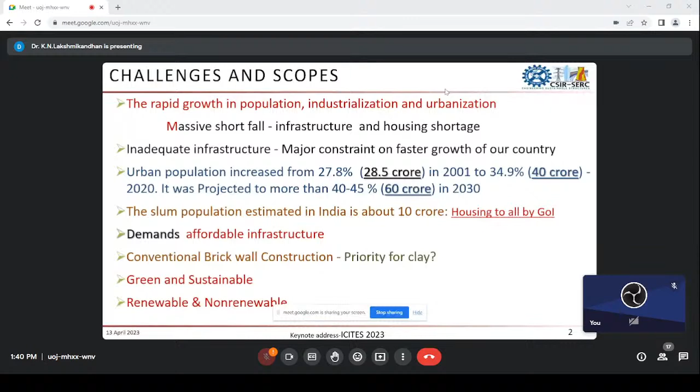These are the challenges, scopes, and aims we keep in mind for developing the technology. In this aspect, we found precast construction technology, and we see a lot of future for the construction industry, both in residential and commercial building construction.

So why do we actually need precast construction? One reason is it is the technology for the future, and another is we are suffering a lot with labor and construction material, and the rising cost of materials. This is another factor we are facing as a problem.

Also, the unplanned construction practices we use currently waste a lot of materials and natural resources, which is a key concern. Similarly, conventional construction normally disturbs the movement of vehicles, causes traffic inconvenience, and environmental disturbance. These are some factors we see in regular construction activity. So we feel that precast construction, along with affordable construction practices, are key for the future development of the country.

So how can we achieve this? These are some points on how this can be achieved. We can plan for this because precast construction always follows a regular pattern, and we also use technology for mass production.

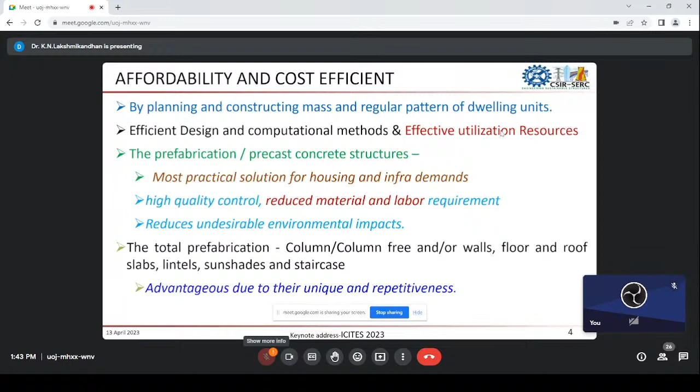This is a very big advantage we have. If we can capitalize on these advancements, we can get much better quality control.

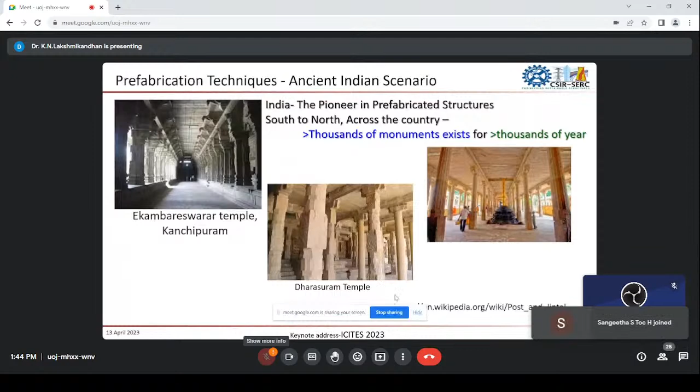Prefabrication or precast is not very new to the Indian continent. Considering more than 1,000 years of practice, the Indian continent has been very keen to develop prefabricated construction using these tools. Thousands of monumental structures existing around us showcase this ability for prefabrication construction.

As a current scenario, the Indian perspective is focusing on development of precast construction, which may include only the superstructure or both substructure and superstructure. Everything nowadays is pre-planned, and we are developing the technology.

These are some of the basic codes we should be very keen on and thorough about when implementing or developing any technology. One is IS-456, which is very important and basic to us, along with codes relevant to prefabrication, including prefab construction.

IS-15916 and IS-15917, and for construction of large wall panels - that is, prefabricated large panels - we can go for IS-11447. These are some of the codes, and it's very important to know the points given in each code.

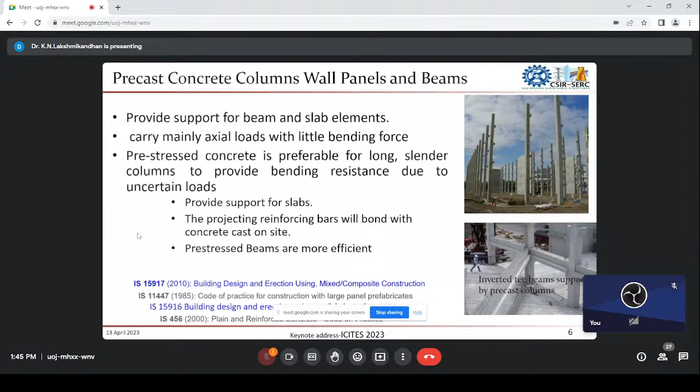In all this prefabrication construction, there are a few things we can concentrate on separately, because they have huge potential for saving cost as well as improving the quality of construction.

One is the roof. Normally the roof constructed in commercial construction exploits around 30 to 40% of the steel, and if you consider the cost, around 15 to 25% of the cost is mainly for roof development. So if we can develop technology that contributes to closing these roofs, it can save a lot of resources as well as initial fund spending.

You are very familiar with two-way slabs. Normally, one-way slab action is the preferred construction practice in the industry nowadays. But the two-way slab has very good scope, as well as better economy and load distribution factors considering the two-way slab action. The prefabrication industry is now concentrating on developing two-way slab construction, which we will see later.

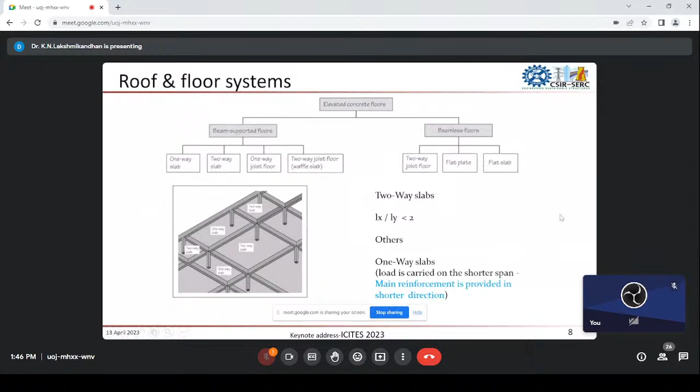This is the pattern of load transmission. Now I'm going to present 4 technologies we developed focusing on rural areas, semi-urban areas, or urban areas. We have developed many technologies, and among them I'm going to present the 4 technologies we developed for rural implementation.

Normally, ferrocement is a good material composition with good scope for future construction practice. It is a composite material - a refined mesh combined with mortar, trying to act together rather than as separate steel and separate concrete as designed in normal physics. This is a totally different way of behaving - it behaves like a single entity.

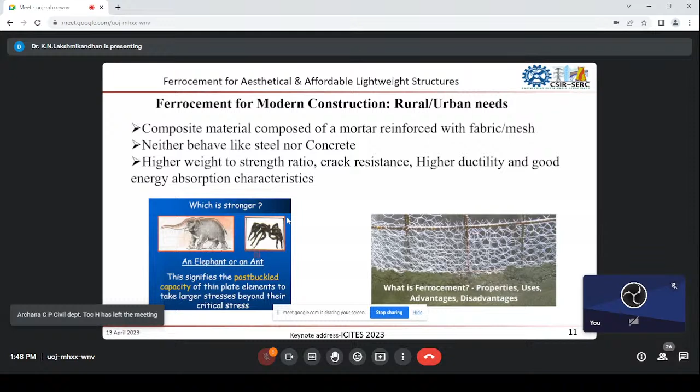Normally, if you're comparing with an RC structure or a plain concrete structure, whatever the case, this ferrocement will have a higher weight-to-strength ratio. This ferrocement comes under very thin elements, and thin elements have enormous post-buckling behavior, which contributes a lot to the strength and load carrying capacity.

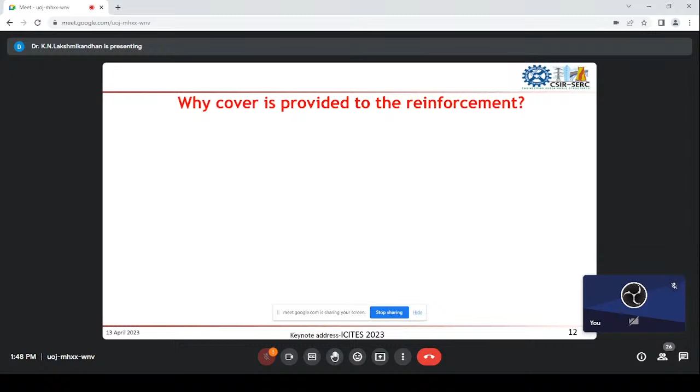So why is cover provided? When it comes to reinforced concrete, the cover plays a major role. If you take a regular reinforced concrete structure, what is the cover and why is it provided? In what ways can we achieve proper cover? Because cover is a very key parameter for the reinforced concrete system. We have to ensure that proper cover is provided using cover blocks and proper protection, which protects the reinforcement from corrosion.

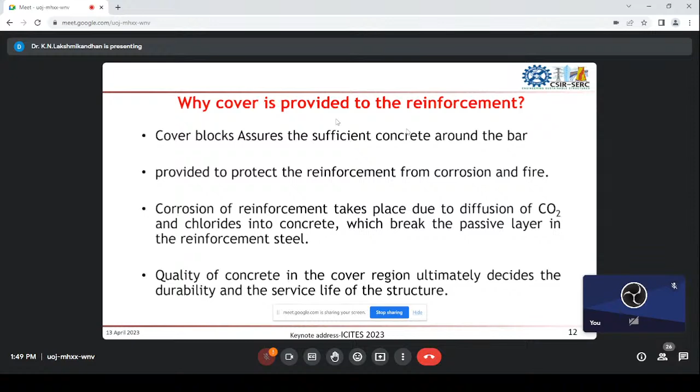So the quality of the concrete normally depends on what cover thickness you have provided for the reinforced concrete system.

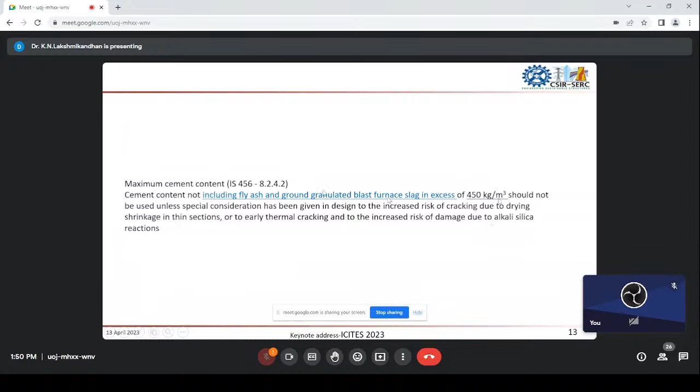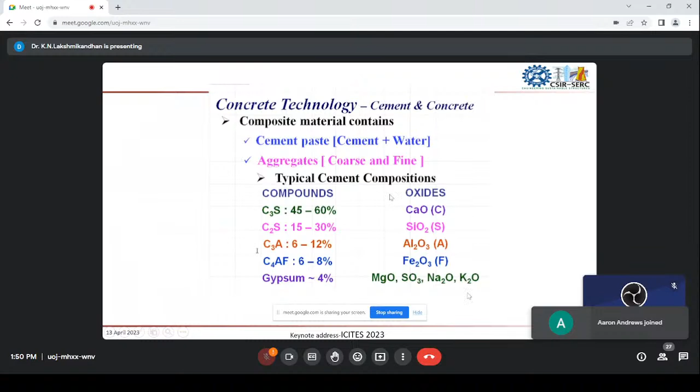If you consider the cement's chemical composition, it has tricalcium silicate, dicalcium silicate, tricalcium aluminate, and other oxides. These are all compositions of cement available for the development of its characteristics.

This is the general hydration, the chemical reaction that happens when you add water with cement. Normally this is called the binder property, and this quantity is normally around 45 to 60%.

The remaining product after the reaction is calcium hydroxide, which is a very key chemical property that makes the concrete durable. This maintains the alkalinity, and the pH is maintained around 12.5 to 13.5.

This is the key factor which protects the rebar from corrosion. As long as the concrete is in an alkaline state, it can protect the steel. When it becomes acidic in nature, the steel starts to corrode, and it becomes accelerated corrosion, quickly losing its properties.

But what is the percentage? Normally we need to maintain this pH around 10 to 15%, around 13% normally we consider. The 13% presence of calcium hydroxide can keep the pH around 12.5 to 13.5.

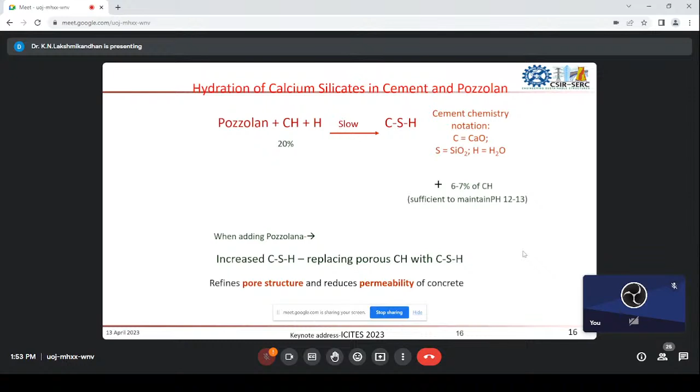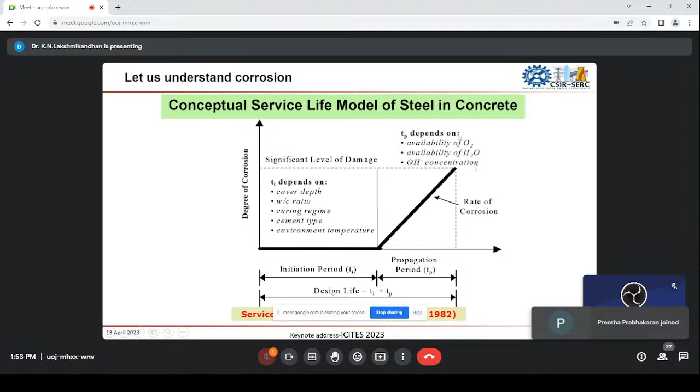This is the typical representation of the life model for steel in concrete. This is the initiation period - during initiation of corrosion, the steel will be strong enough. Once corrosion is spotted, it becomes very fast and accelerated. This generally depends on the availability of oxygen and water, and the OH concentration. Normally when the calcium hydroxide concentration is very high, corrosion is controlled; if there is a reduction in calcium hydroxide concentration, then faster corrosion happens.

This is how the steel gets corroded - there are two reactions happening in this corrosion aspect: one is the anodic reaction, and the second is the cathodic reaction. In the anodic reaction, the steel reacts with water and releases an electron. That electron travels and reacts again, combining with water molecules and oxygen available within the concrete medium, forming OH again. So this anodic and cathodic interplay causes the corrosion aspect.

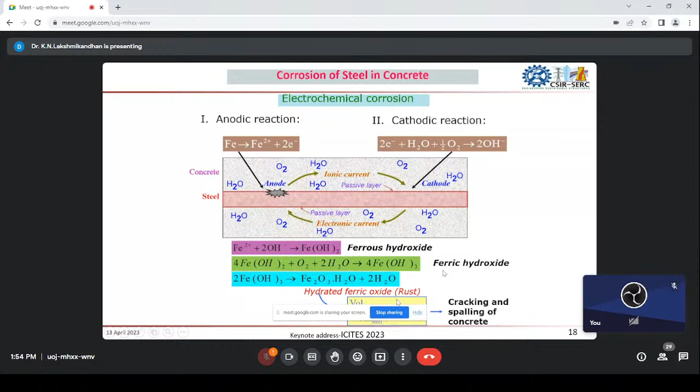In a similar way, chloride enters into the concrete and reacts with the calcium hydroxide, and makes the alkalinity into acidity. So in both ways, what we see is the carbon dioxide or chloride does not directly impact the concrete; it only reacts with the calcium hydroxide.

Once the calcium hydroxide, which is normally called the passive protection layer, is breaking down, then corrosion starts. So this way, carbon dioxide or chloride contributes to corrosion development.

When you see the corrosion aspect, generally Fe represents the reinforcement. These are different stages of different chemical compositions of iron, reacting with water and oxygen, creating different compositions. Initially, the diameter of the rod will be increasing 2 times, 3 times, 4 times, up to 7 times its diameter.

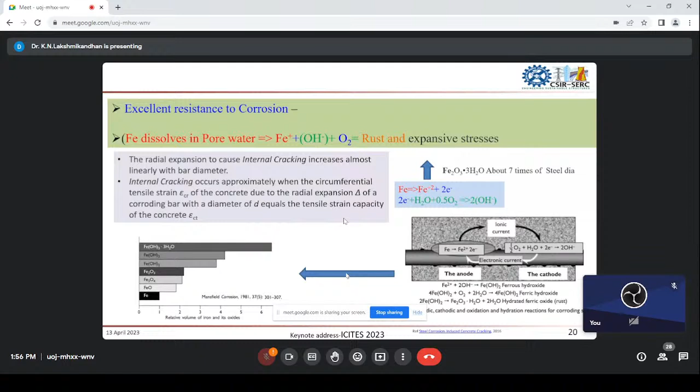From the basic instincts of material characterization, what we find is cement content. If you have more cement content, there will be more calcium hydroxide. And if the concrete is very dense, it will not permit water or oxygen to enter.

This way we can control corrosion: one is by keeping the passive layer sufficient, and second is by keeping the density very high, so we protect the concrete composite.

Similarly, calcium hydroxide or the oxides are chemicals which protect the steel by becoming a passive layer. So if you can control carbon dioxide and chloride diffusion, which normally react with the calcium hydroxide,

then you have control, and corrosion cannot start, so the durability of the structure will be very, very high.

If you use galvanized iron, it becomes a compensating agent that reduces corrosion. Similarly, using a smaller diameter of wire helps.

Wires like 1.25 mm or 2 mm have a very small diameter. With such small diameter wires, when there is a possibility of corrosion, the volumetric increase will try to bulge.

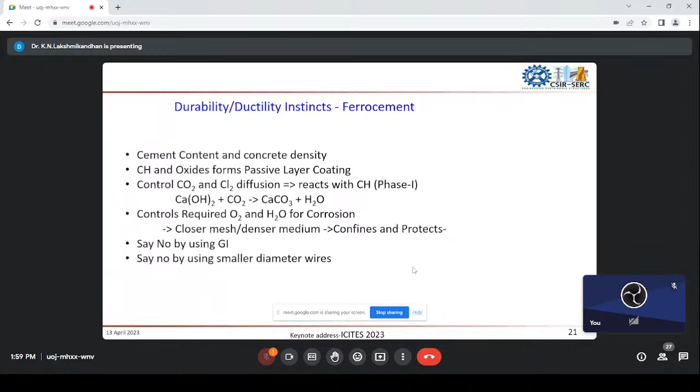Now let's come to ferrocement. In ferrocement, we effectively utilize these aspects. That's why ferrocement is a non-corrosive, highly ductile material, because we combine all these characterizations together and utilize them effectively.

Now come to the strength aspect. When you come to ferrocement panels, it is a very thin element. If you apply a compression force, it will take the compression force until it reaches the critical stress value.

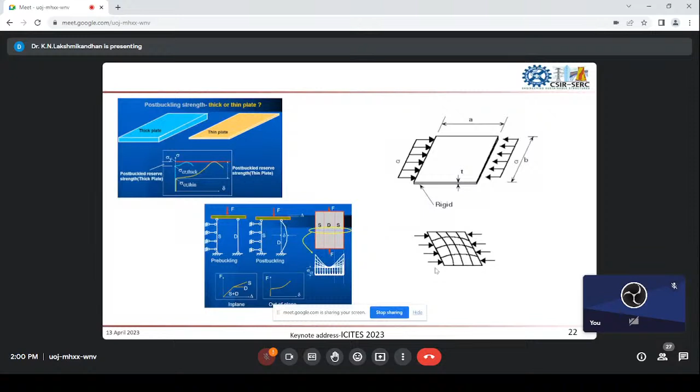Once the critical stress value is reached, because of the thin section, it buckles. When the plate starts to buckle, the post-buckling strength is reached, which gives more strength compared to what we normally design in plain concrete or RC concrete.

We are developing many technologies focusing on many applications, based on a few of the applications.

This is a typical test we carried out to check whether post-buckling phenomena is happening in ferrocement or not. We developed a flowable mix so that we can go for single casting of ferrocement panels. Normally in the earlier period, they would go for plastering with a high-skilled mason, but now the availability of high-skilled masons is very rare, and it's difficult to get people who can achieve a good finish and proper compaction in the ferrocement medium.

So the alternative we decided on is to go for single casting of ferrocement. This is the way we developed a mix which can flow into the mold, and this is the final system we developed: ferrocement with ribbed edges, and every 1 meter we propose to give a rib.

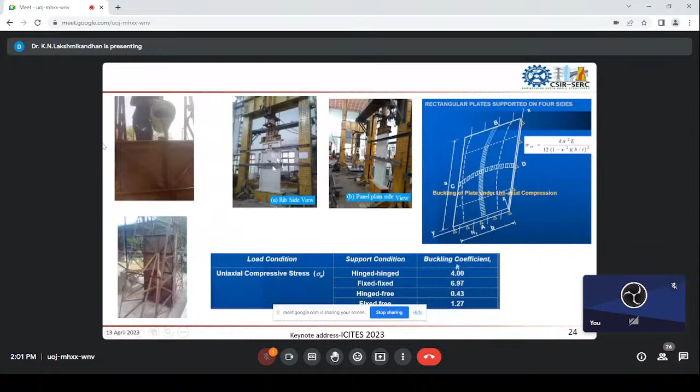So that each bay will act as an individual panel. What we are trying here is to avoid global buckling. We are trying to convert the panels so that it goes into non-global buckling.

So we developed different technologies, and these are the technologies we developed with precast engineering for the service core units. Everything is cast at the site and then assembled in the field. This way, within 2 or 3 hours, we can assemble and utilize these service core units for public use.

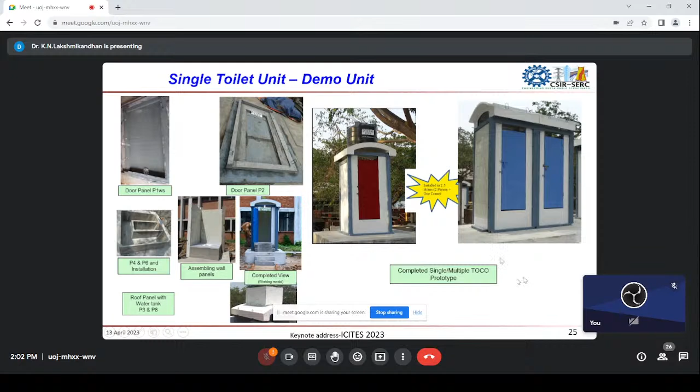Similarly, we developed many formats, because cost is a key factor in the Indian context. So to cater to the different demands available in the field, based on the affordability of the people, we developed many technologies. The technology we earlier developed costs around 20,000 to 25,000 rupees. We transformed this technology with a partially superstructure and partially substructure system, so that the cost comes down to around 10,000 rupees. These are different technologies we developed using ferrocement.

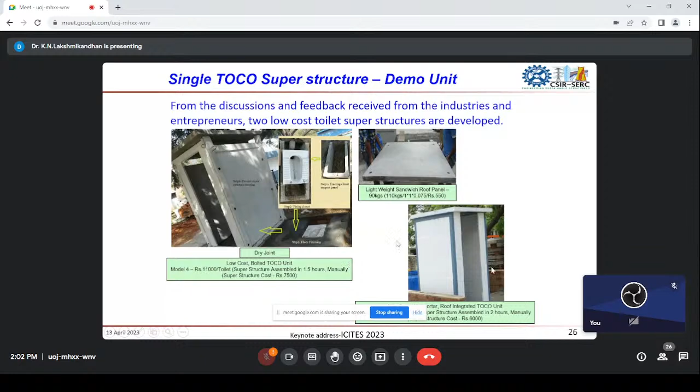The latest one we develop—we keep developing technologies because of the simplicity and ruggedness, and how we implement the technology in the field, how we see it being implemented, and what is the requirement of machineries. These things normally govern any precast product implementation.

So this is one technology we developed. There's no need for any machineries or equipment, so we can simply install each component in the field without any difficulties.

So the final view of this one is like what we are going for with the single casting. The same way, we can see the surfaces after finishing with proper coatings.

So this is one more technology. The same ferrocement technology we used for developing sedimentation and percolation septic tanks. In these cases, it's like an array system, so each tank will be filled simultaneously, and we can close that system so it's permitted to percolate. Meanwhile, the next one will be used for the practice. This way, we aim to control the higher capacity septic tank requirements.

The same technology we used for developing water tanks. This water tank is cast in a single casting using flowable concrete, with 25mm thickness, which can hold the water. Regarding the corrosion aspect, the concrete itself is sufficient, having enough strength to hold the steel together, so steel corrosion will not happen.

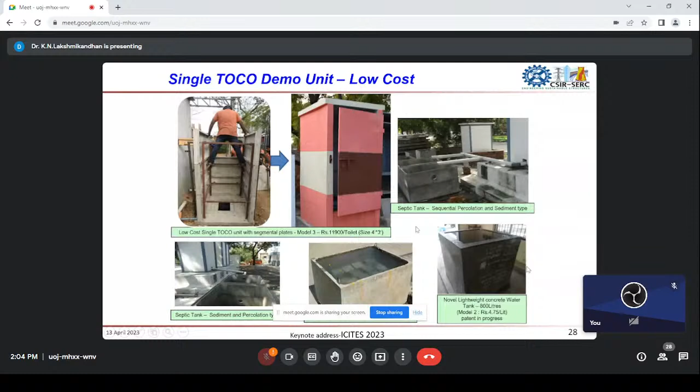So this is about the single system for service core utilizations. So considering the housing demand.

Now considering the housing demand, what is available in practice is brick infill built into framed systems. When there is any lateral load, like seismic or wind, whatever the case may be, it transfers the load into the bricks, and the bricks initially take a lot of load due to higher stiffness. Once cracks start, the structure begins to fall down, which creates a major issue in normal building construction.

This is the key factor concerning why we can go for the alternative instead of brick infills. If you apply the lateral load to a ferrocement infill, the capacity is different because this entire system acts as a single system till failure. Because of the thinner skin, it starts to buckle in the lateral direction, that is, the out of plane direction.

Normally in the out of plane direction, cracks form, and the brick falls out of plane because it does not have enough capability to hold together. But in ferrocement, the case is different, it has enough strength to hold together. As a result, the entire system acts together until the ultimate failure, avoiding the falling of any concrete.

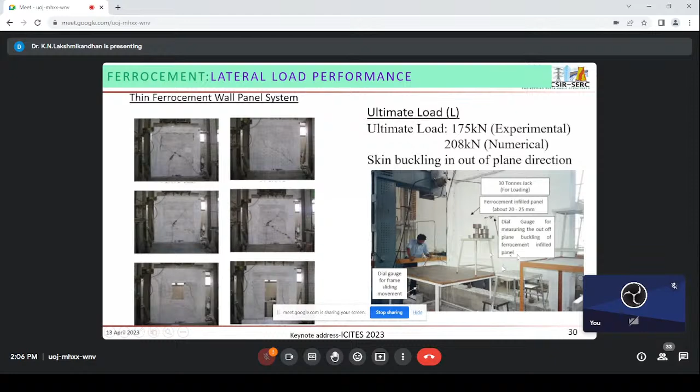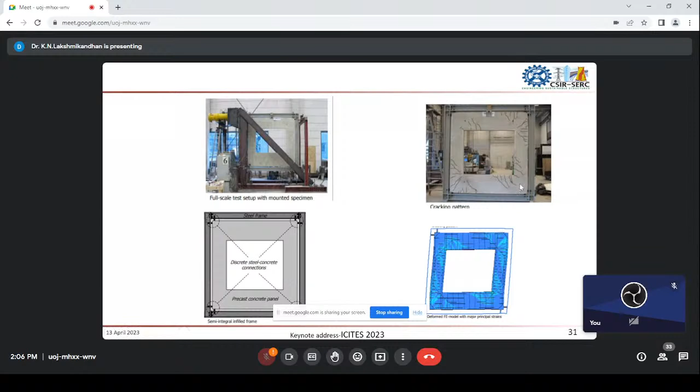This way, ferrocement is a very high demand composite for the construction industry. When there is an opening, the behavior of ferrocement is still the same way. After the crack, it acts together, giving it higher strength compared to other construction practices. The post-buckling characterization, the strength characterization, and the confinement action are all combined together in ferrocement, and as a result we get a much better wall.

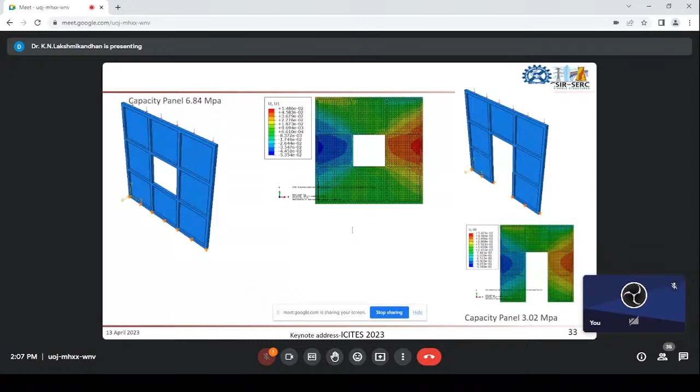So we examined this using finite element software. These models are created using Abaqus, and we used the damage plasticity model. We checked different configurations for developing housing, with openings such as window or door openings, simulated in the software. We integrated everything together and found it behaves the same way as conventional structures, at a much lower cost.

Because of this reduction in dead weight, it will be more advantageous during any earthquake or lateral load distribution. These houses can be constructed within hours, maybe within 12 to 20 hours we can construct a G+2 structure. It is lightweight to handle, and finally all the components are integrated together so the entire structure acts together during load transmission.

Similarly, the construction cost drastically comes down when using this ferrocement construction housing. It comes to less than 600 rupees per square foot, which is very less compared to what is in practice now, around 1,500 to 1,800 rupees per square foot.

Regarding durability and ductility, because of the nature of the material, ferrocement acts together as a single material and exhibits good ductility and good durability over time. Now coming to heat insulation and sound insulation, this is a key factor to think about whether ferrocement can be used or not. Normally these types of structures may be useful for urban, semi-urban, or rural areas.

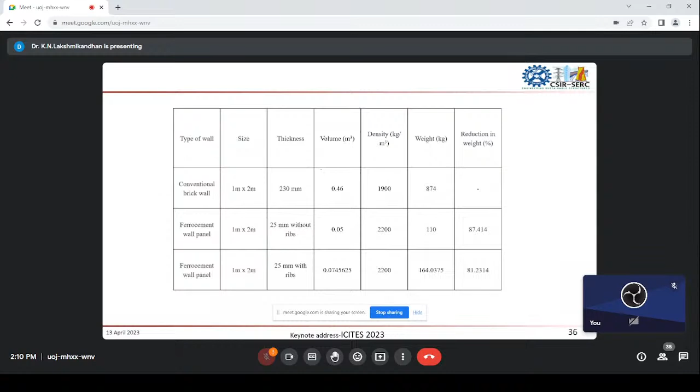Positive curvature will compensate the tension whatever comes there, and the negative curvature normally will compensate for the compression. So we are compensating the compression and tension using the shape itself, so there is no requirement of reinforcement for transferring this load to the structure.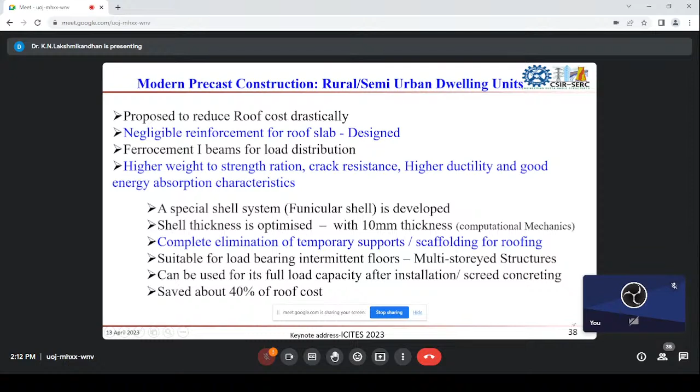Second, the weight reduction is around 30 to 35% of roof weight coming down because of this technology.

So these are the typical ferrocement models we developed using SolidWorks, and then from SolidWorks we transformed and imported into Abaqus, and we modeled this particular shell. If you see this, this is the positive curvature, and if you see these edges, there will be a slight downward curve representing the negative curvature.

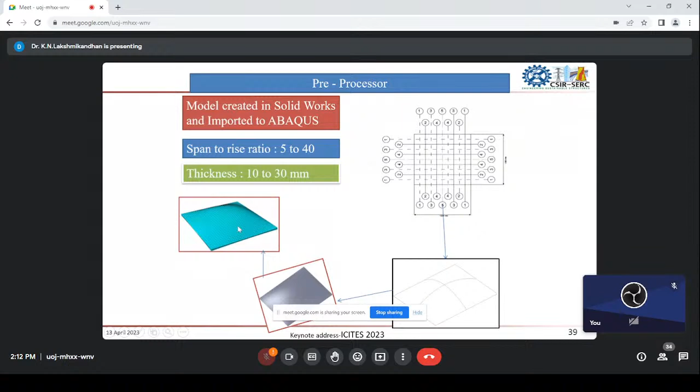So the shell itself has both positive and negative curvature, so that whatever results we are getting from the external loads will be compensated by the shell. That's the way we developed it. So this is a typical view of the models, for the single point when there is a single load.

We consider both two-way action and one-way action, because both have application in practice. For the one-way application, we can place these ferrocement elements in a row, and similarly row by row we can go for construction so that we can easily finish the roof within a short duration. That's why the one-way slab is very useful.

And if it is a two-way slab, you can do a single unit or multiple single unit systems, then go for the four-edge supported system. In both ways we have advantages, and we have to decide which one is better for our cases. In both cases we have good load carrying capacity, and this is the typical testing we did for this.

This shell we are seeing is the slab weight. Normally we are naming this shell a slab here, 1 meter by 1 meter, and the total dead weight of the slab is just 60 kgs. That is the beauty of the system. The thickness of the shell is 10 mm, and there is no reinforcement provided in the shells. The shells you are seeing here are without any reinforcement.

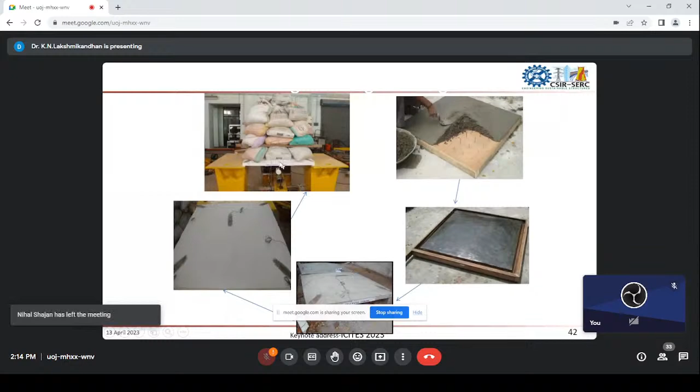So this is a typical implementation. This is the ferrocement I-beams we developed and tested. It shows very excellent ductility characteristics, and this is the implementation of the shell.

In total we used 32 shells, 32 shells meaning 32 into 60 kgs. That's all the weight of the roof for a span of 4 meters by 9 meters. So this is a typical view, you can see.

The total cost saving we are seeing here is 30%, and the total scaffolding requirement is totally eliminated.

So there is only one problem we see during erection: if there is any sudden accidental load, like an impact, because the shell is unreinforced, careless action during erection will create a catastrophic failure where the shell entirely fails within a few seconds.

But we don't usually have that issue. If you are capable of erecting it properly, it can carry a load of 1,500 kgs per square meter when applied gradually. But if applied suddenly, it cannot even take 15 kg of weight—sudden failure will happen. Considering this, we are now revising our technology using fibers.

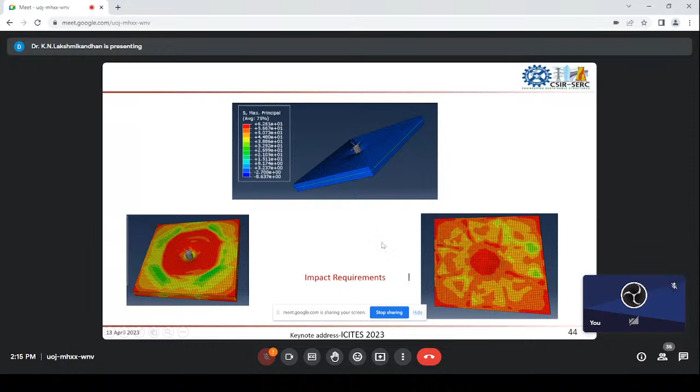Now we are doing impact studies. Maybe we will come up with the product within a few months.

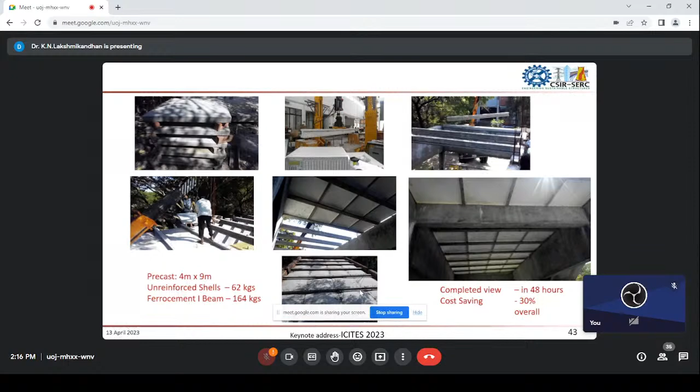So this is about the technology we developed using an I-section with particular shell panels in between. On top of this, a lean mix screed concrete will be placed, and that can be used as a roof for the next floor—that is, the floor for the next level.

Okay, now I'm coming to the next very important thing. Just to finish within 5 minutes, I will go through the things.

So we were constantly working on developing the precast sandwich panel technology. Whatever the earlier setbacks were, like thermal comfort or sound insulation, we are coming with another technology. It is a double skin - instead of single skin ferrocement, we are now using a double skin ferrocement on both sides. How that integration happens and what the infills will be, these are the factors governing the efficiency of the system. We filed 2 patents and received our patent numbers for protecting this topic.

So this is a typical view of one of the 3D panels. This is called a standard panel, normally available in the market, which has two meshes at the edges integrated together with a three-dimensional truss mesh. This truss mesh connects the two reinforcements at the edges. This is what we see in the market today, and it is cast as a single element. The same element can be used for both wall and roof. If the structure is less than 4 or 5 stories, we can directly go for construction without any columns requirement - the panel itself is capable of carrying the load, as we'll see later.

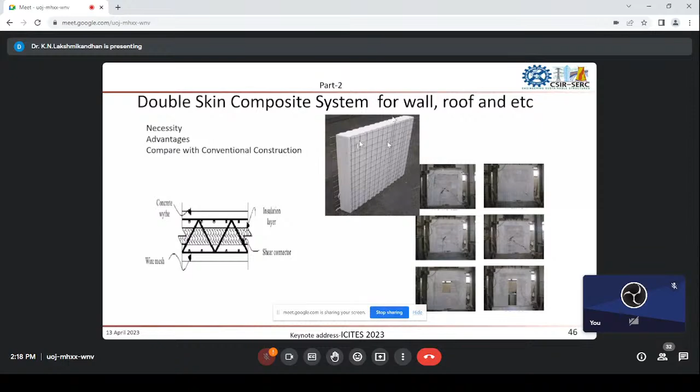So this is a typical one we are discussing, available in the market. The one problem we are facing is the cost, around 1,500 rupees per square meter, based on the density of the EPS - expanded polystyrene - used for the infill. In the outer skin, only 20 or 25 mm thickness of ferrocement is cast, and the remaining 100 mm is just infill, with no concrete. This way we get a better lightweight system which can carry a very good load compared to solid panels.

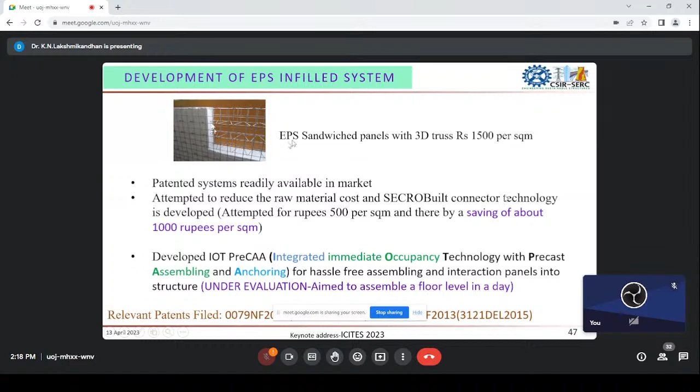When you apply the load, there are two ferrocement skins, and if there is no integration between them, due to the buckling nature of the ferrocement skin under load, it goes out of plane. As a result, there is an overall strength reduction. For that reason, market-available products use a 3D truss mesh. But the 3D truss mesh has its own deficiency - during higher load conditions, the truss behaves better in tension, but the truss in compression will start to buckle, and as a result the strength characteristics come down.

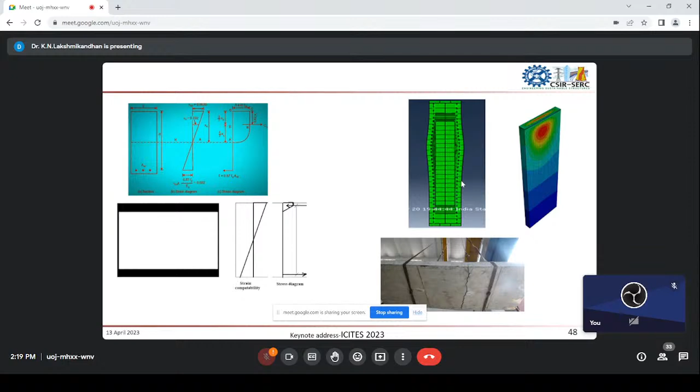Considering this, we developed a composite system which performs much better in both compression and tension. This is the technology we developed. Considering the load carrying capacity, the standard panel has 78 kN, and when we use our composite connector, the load carrying capacity of this panel comes to around 1.2 times that.

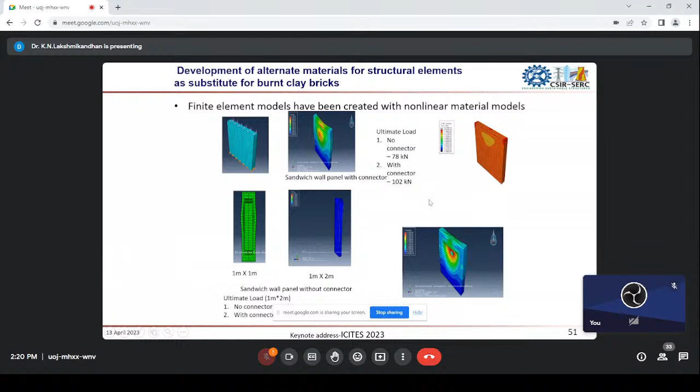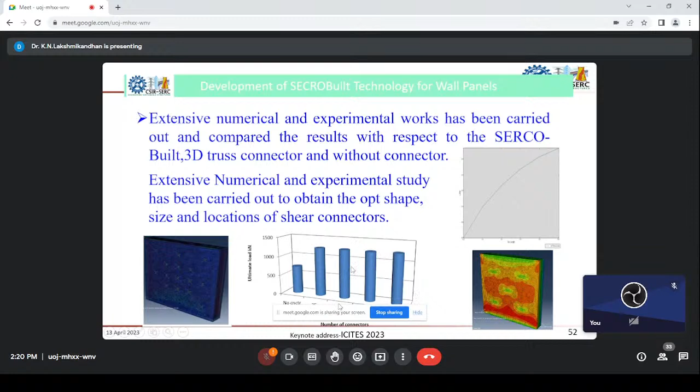So these are the typical results we are getting. When there is no connection, the strength is around 60, and if the connection is enhanced, it nearly doubles the strength. These two cases are for the standard panels available in the market, and the remaining two are for our new composite connector. The load carrying capacity is more or less the same, the ductile performance is similar, but the post-buckling behavior of the newly developed connector is much better than what is available in the market.

So these are the different cases of the products we have developed.

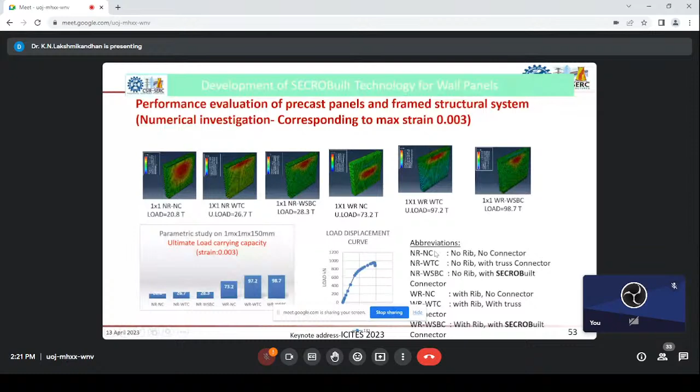So this is the failure pattern without any interfacial connector. It will fail at the ribs and then debonds. As a result, the load carrying capacity comes down.

When you have an interfacial connector, there is a shear interface connector between the two skins. Then the load carrying capacity is very high, and only local crushing happens while the rest of the unit remains intact. Everywhere only local crushing is happening, and the entire system is intact.

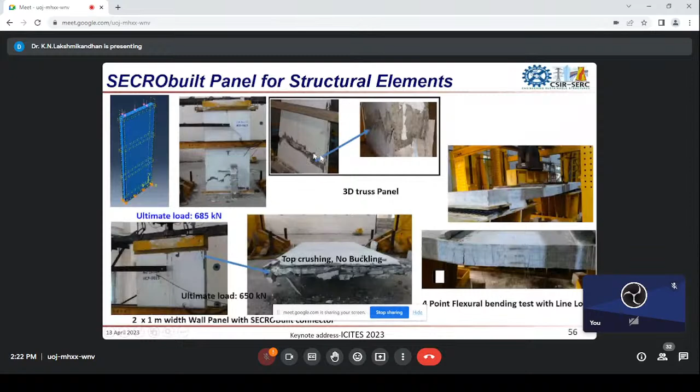This is for the 3D truss connector which is available in the market. It carries an equivalent load, but after the post-peak behavior, the truss interconnecting the two skins buckles. As a result, due to the buckling nature, it loses its monolithic behavior.

This is another typical case for a different thickness, without the connector. Here, what we see is only the concrete used to interconnect the skins. It can carry the compression but cannot carry the tension. Again, the skin separates, acts separately, and buckles. That's the result we see.

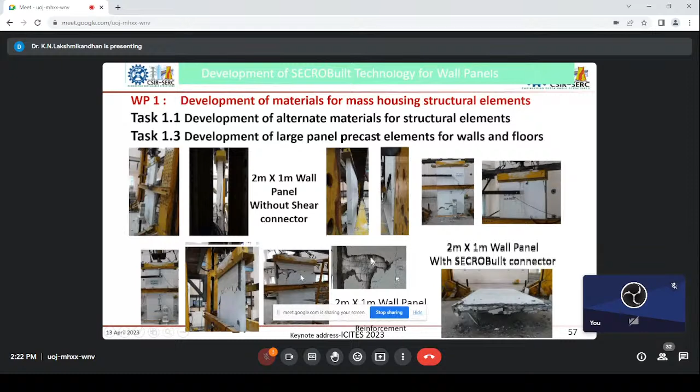So a composite connection has to be provided to integrate with it.

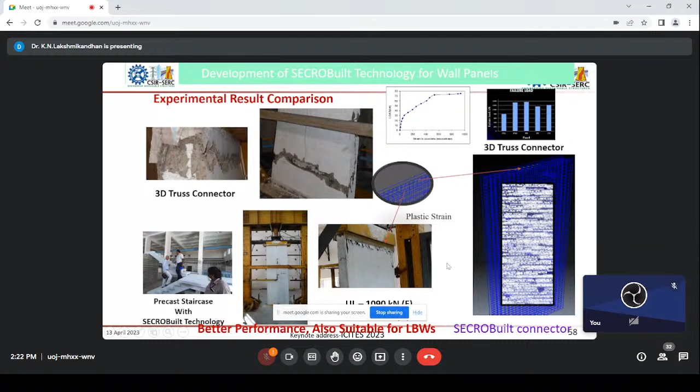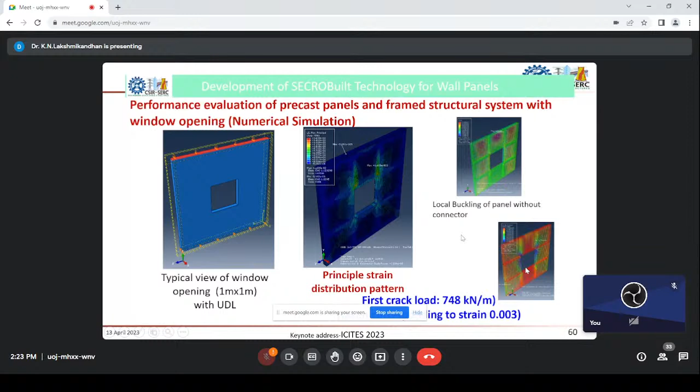That is the advantage. Similarly, when combining one story with another, normally it is carried out through the roof beams and roof slab, and over that another wall is placed. So the integration between the lower floor and upper floor is important.

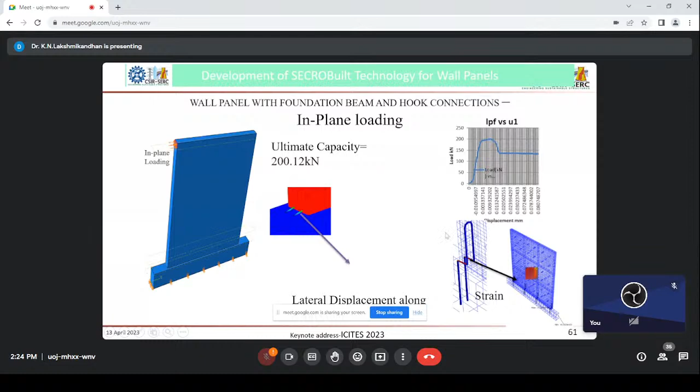We carried out the interfacial resistance required to transmit this lateral load, and we found that a 12 mm diameter bar for the integration is more than sufficient to transfer the shear for a G+2 building.

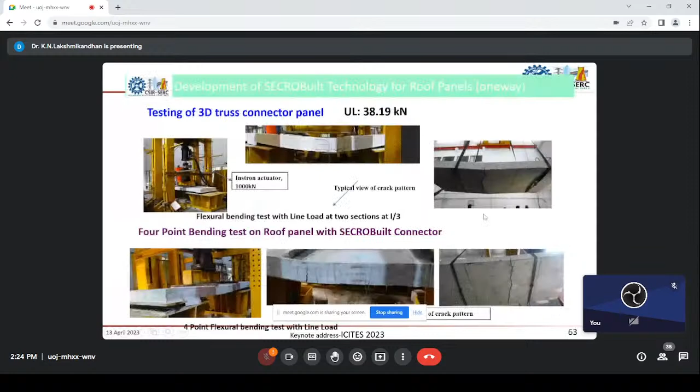Similarly, this is a typical behavior of the interface, and this is a typical behavior under 2-point loading, which we compared with normal one-way slabs used for one-way slab construction. We wanted to develop a two-way slab, so we developed a two-way slab, and this is the crack pattern.

As an integrated system, the lightweight panel we developed acts together and deforms in a uniform way. As a result, we get a much better load carrying capacity.

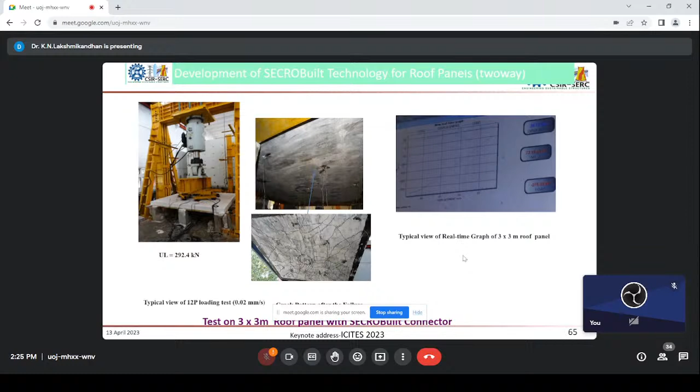Compared to RC walls and RC two-way slabs, this panel takes somewhat higher load due to the uniform distribution.

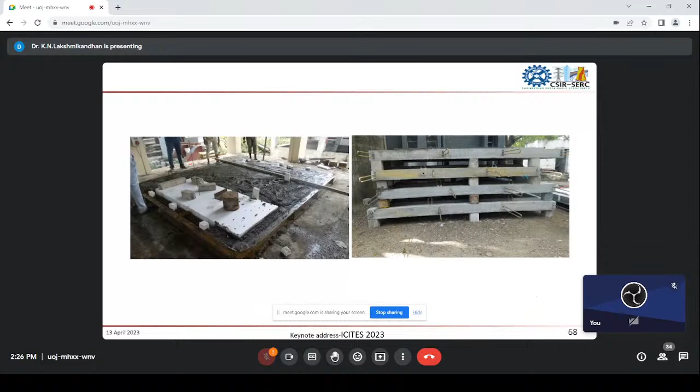Similarly, we integrated two stories, then performed the analysis, and found it very useful for construction without escalating cost, without compromising any strength characteristics, and without affecting the affordability for all groups. So we cast and transported the elements, and this is how we assembled the entire G+1 structure.

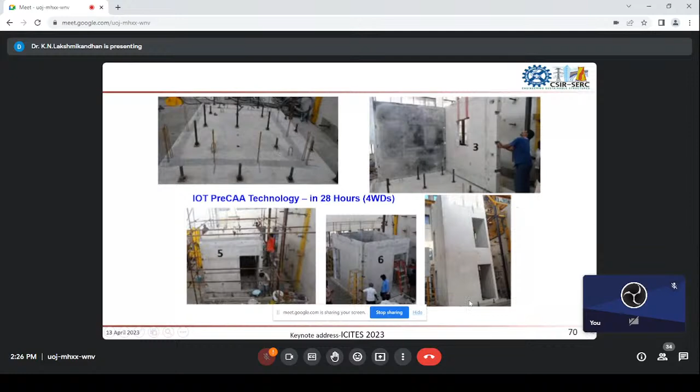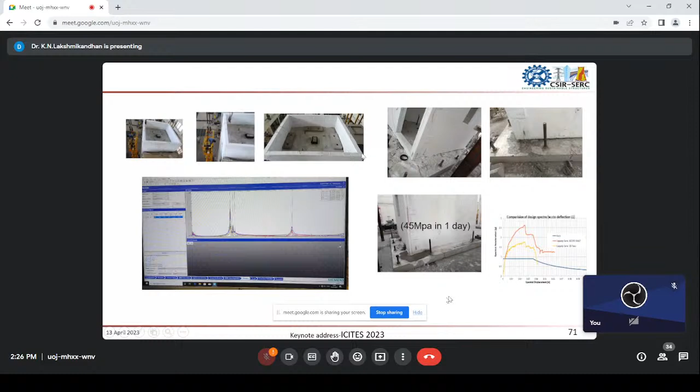We assembled it in 28 hours and tested it for lateral load. Similarly, we applied actuators and exciters to find the stiffness of this structure. It turns out the stiffness of this structure and the stiffness of a solid concrete RC structure are both the same, and as a result, the composite action we achieve is a perfect composite action with 100% integration.

So this is a typical view of the structure after the test. Even after the test, we are seeing very minor cracks everywhere, and there are no major cracks which happen.

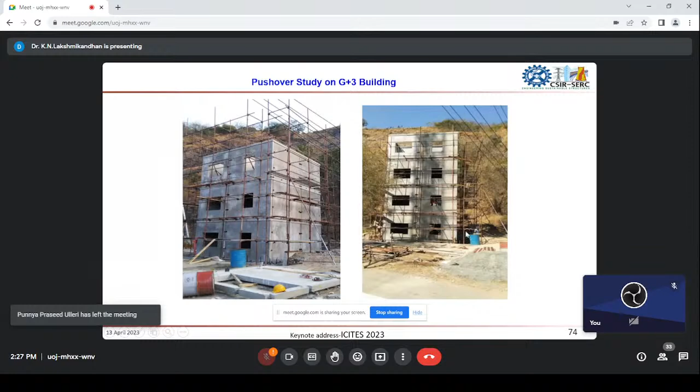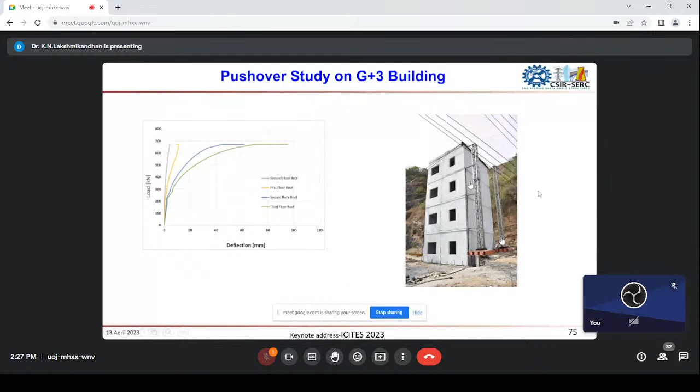And as we extended this technology for developing a G+3 building, it's a typical G+3 building assembled, and we tested it for the lateral load. We are using ropes to pull from the top, and we found that the structure we are developing, with a lightweight roof and wall panels, is capable of integrating together and carrying the load as per zone 5 recommendations. It satisfies the load conditions well above what is required for the zone. So this way, the technologies are helpful for affordable housing. Thank you. Any questions?

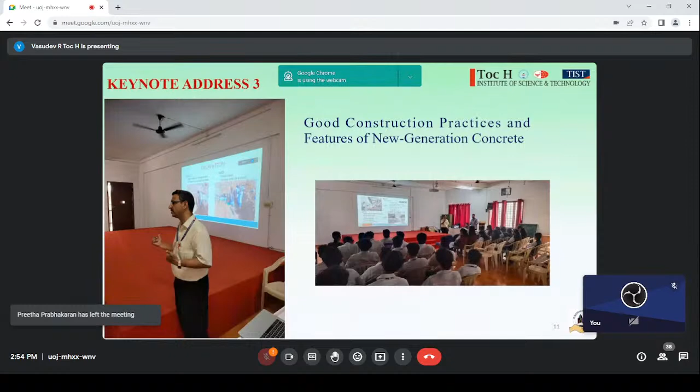The third address was intended to be by Devdas Menon, sir, but unfortunately he couldn't attend the session, so I took over with a small presentation on good construction practices, essential for young aspirants of engineering, and a few new generation concretes were also discussed.

The fourth keynote address was by the President of our ASCE Southern Region, Dr. Pradeep Sivanantham, who spoke about the characteristics of infill frames with short column effects.

This morning, we had our fifth keynote address, which was an eye-opener and a new topic to almost all the persons listening to the session. It was about advanced satellite and UAV image processing and remote sensing techniques with sustainable approaches, by Dr. Raju Edla, research scientist at Kumamoto University, Japan.

We also had a technical session by Lakshmikandhan just now, about new techniques adopted in SERC Chennai related to low cost housing.

In the technical sessions on the first day, we had 2 technical sessions with the theme Green Materials and Technologies. On the second day, we had 6 technical sessions, 3 each in parallel sessions in morning and evening, which covered experimental and mathematical analysis related to material properties, sustainable material in geotechnical design, and a blend of other topics in sessions 7 and 8.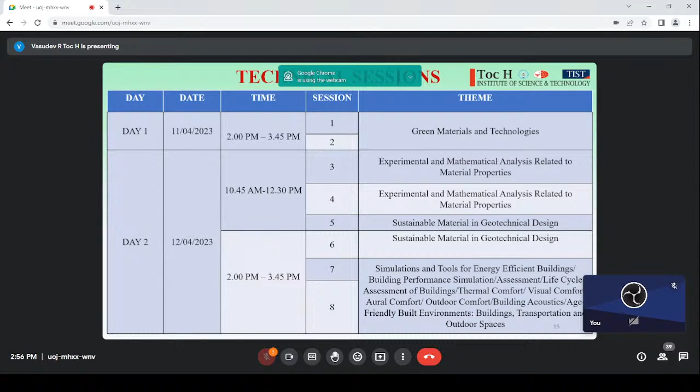And on the third day, that is today's morning session, we had another 3 parallel sessions with themes related to simulations and tools for energy efficient buildings, sustainability in environment, transportation, and a blend of other papers.

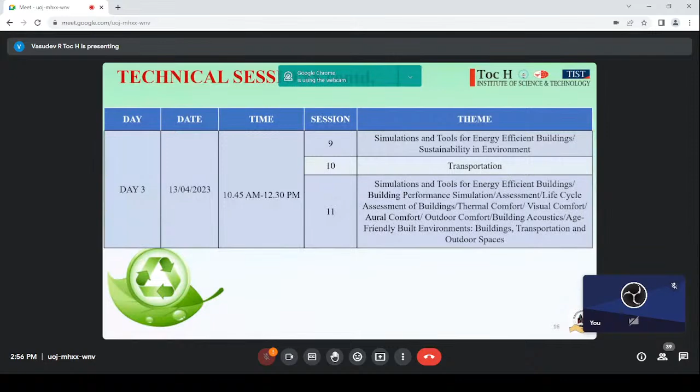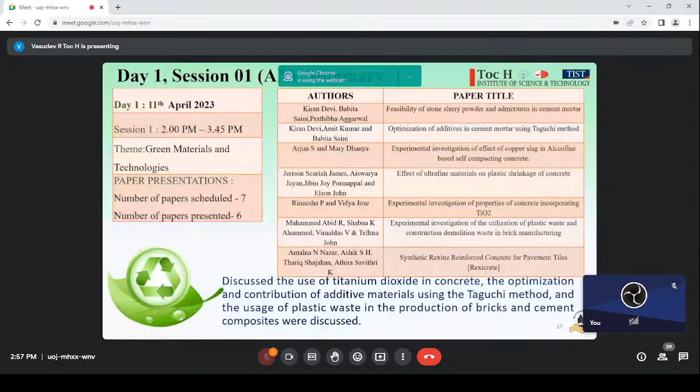In day 1, session 1, we had Green Materials and Technologies, with around 7 papers registered and 6 presented, of which the discussions mainly covered titanium dioxide in concrete, optimization and contribution of additive materials using the Taguchi method, and usage of plastic waste in the production of bricks and cement composites.

The same day in session 2, we had sustainability-based application of different materials in concrete; fresh and hardened properties of high strength fiber reinforced concrete using GGBFS and microsilica were discussed.

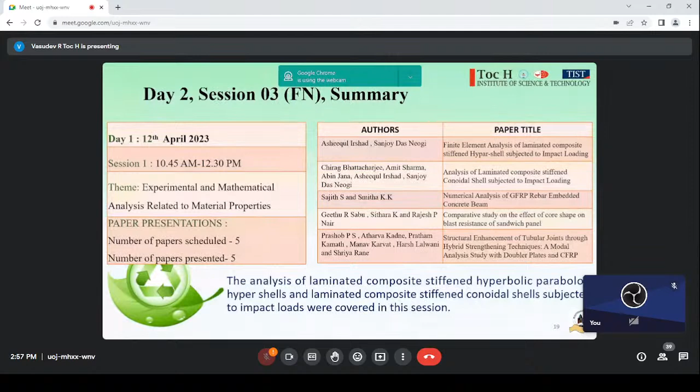In the third session, we had analysis of laminated composite stiffened hyperbolic paraboloid hypershells and laminated composite stiffened conoidal shells subjected to impact loads.

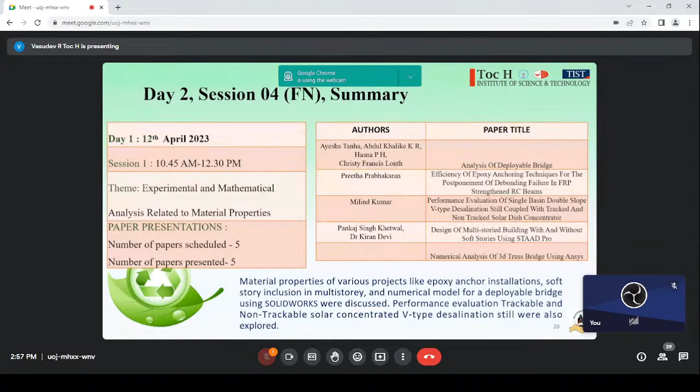In the next session, material properties of various projects like epoxy anchor installations, soft story inclusions in multi-story buildings, and a numerical model for a deployable bridge using SolidWorks were discussed. Performance evaluation of trackable and non-trackable solar concentrated V-type desalination stills were also explored.

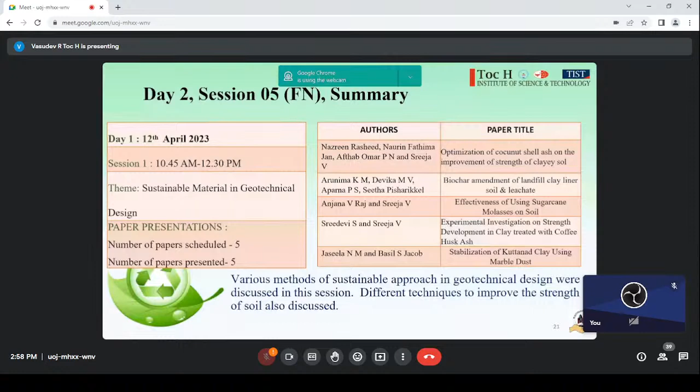On day 2 forenoon session, various methods of sustainable approach in geotechnical design were discussed, along with different techniques to improve the strength of soil. In another presentation, we had soil stabilization methods, utilization of recycled concrete aggregates in stabilizing black cotton soil, and stabilization using nanosilica.

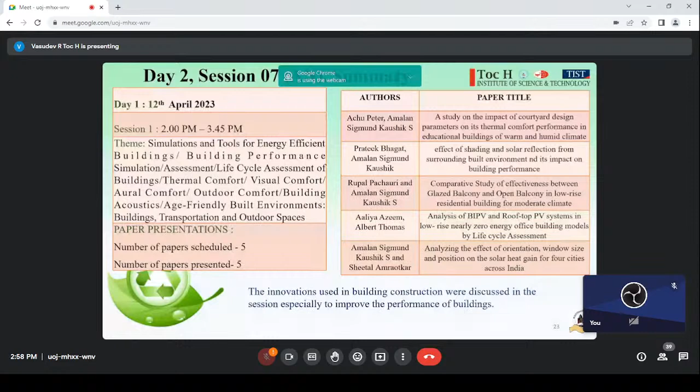In a blend of themes, we had innovations used in building construction, especially to improve building performance. Impact of urbanization and natural water recharge due to increase in built-up area, flood mapping using QGIS software, and a study of hydrodynamic energy saving systems for ship sterns were discussed.

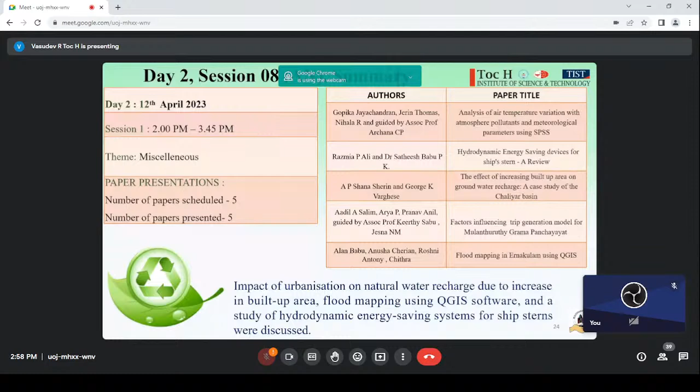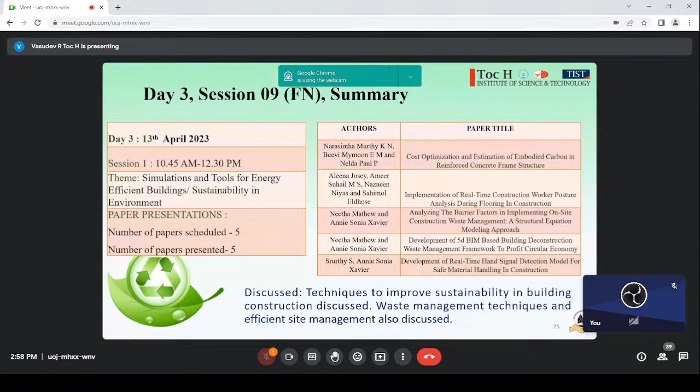In another session this morning, techniques to improve sustainability in building construction, waste management techniques, and efficient site management were discussed. In the transportation engineering sector, we had different pavement alternatives, feeder service modes, and so on. Methods to improve indoor air quality through natural ventilation and assessment of building comfort in urban areas were also discussed in detail in one of the sessions.

That is all about the sessions we discussed, covering vivid varieties of papers from different themes in detail.

We also conducted a cube testing competition in which 33 teams registered and 29 teams came in person to witness the strength of the cubes that they had produced.

The first prize was won by the team from College of Engineering Kidangoor, comprising Arunima CV, Prijit KS, and Sabin John Sakaria.

The second prize was bagged by Ilahia College of Engineering and Technology, with team members Hafiz Ayub, Alif Muhammad, and Arun Kumar KN. Hearty congratulations to the winners.

We also organized a poster presentation and exhibition of posters of various papers submitted by participants, exhibited here on campus, and it was an eye-opener to almost all participants as well as students of the campus. And moving to the most awaited thing, the best paper winners.

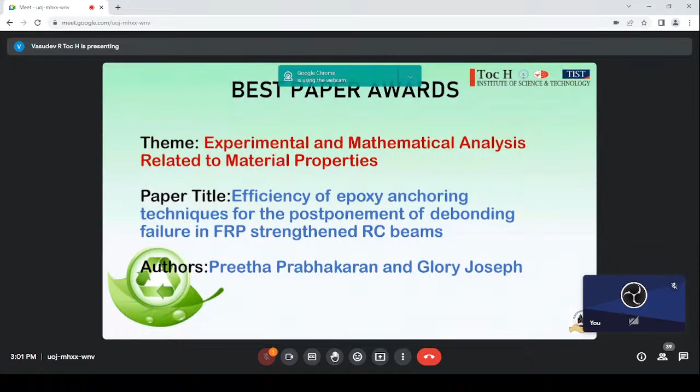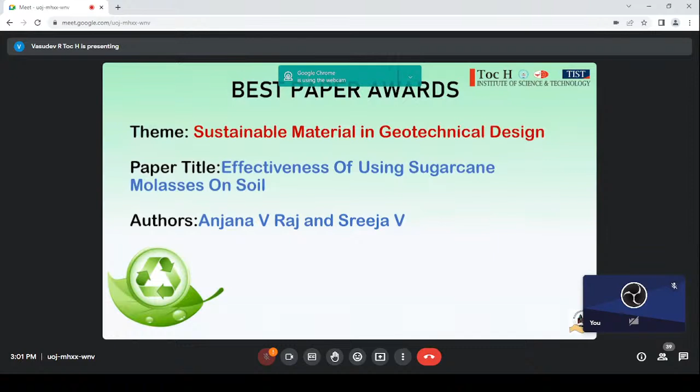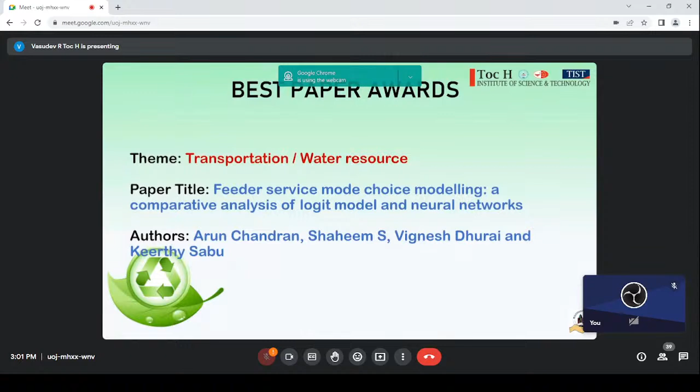In the Transportation and Water Resource themes, 'Feeder Service Mode Choice Modeling: A Comparative Analysis of Logit Model and Neural Networks', authored by Arun Chandran, Shaheem S, Vignesh Dhurai, and Keerthy Sabu, bagged the Best Paper Award.